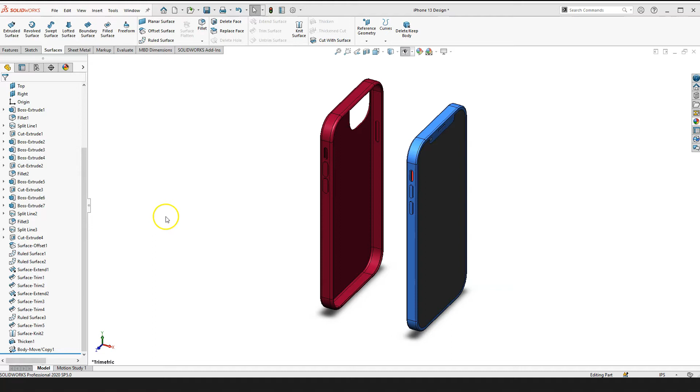Hi guys, in this video I will teach you how to design a cover for iPhone 13. If you have not seen my video on how to design the iPhone 13, please watch that - you will need that design to make this cover. Also please watch the surface modeling techniques for the spoon design, because this cover is pretty much done using all surface features.

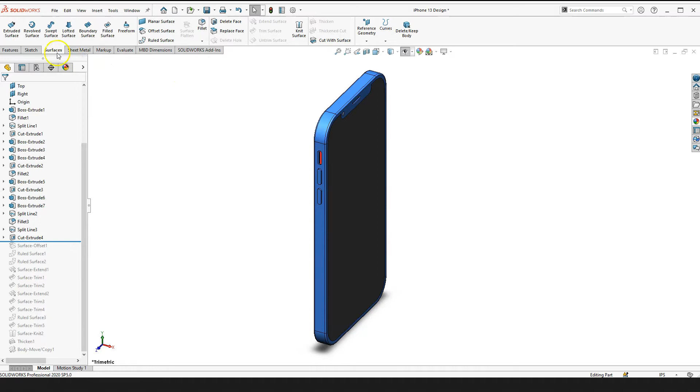Okay, so with the iPhone design, this is where I left off, and I'll go ahead and begin my cover design. First thing you want to do is click on Surface, then click on Offset Surface, and give it about 0.01 inches.

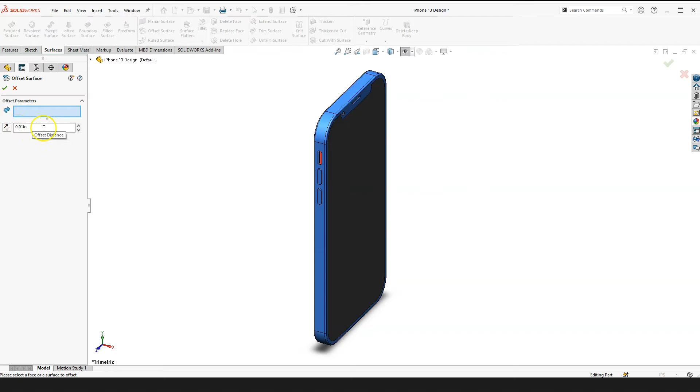I'm working with inches, not millimeters. After you give that offset distance, go ahead and click on the surfaces that you want offsetted. I'll go ahead and begin - I'll click on that surface, and I'll just pretty much go around and pick up all the surfaces.

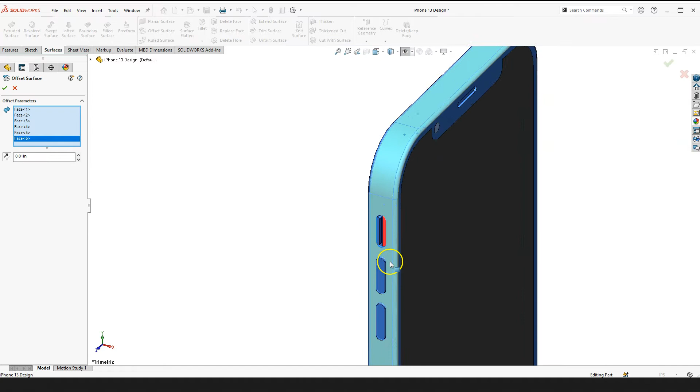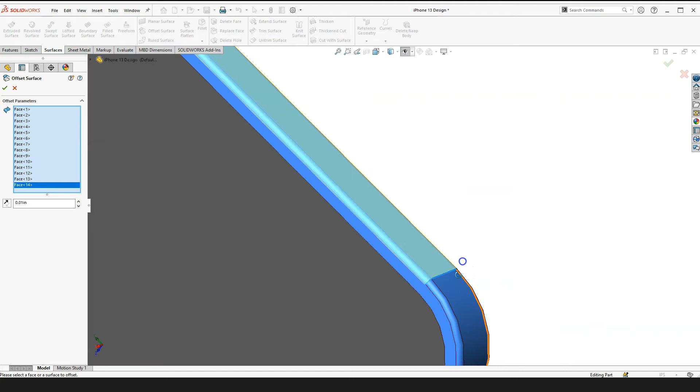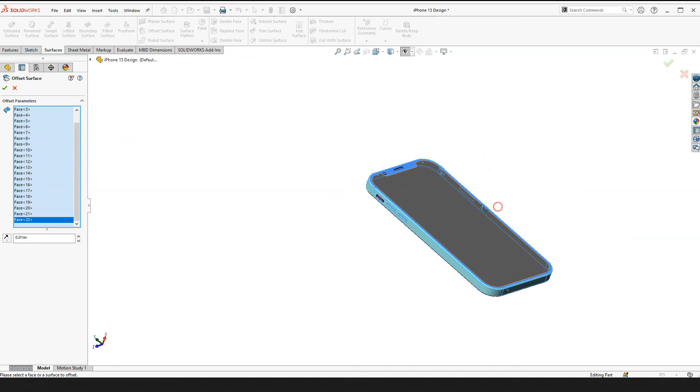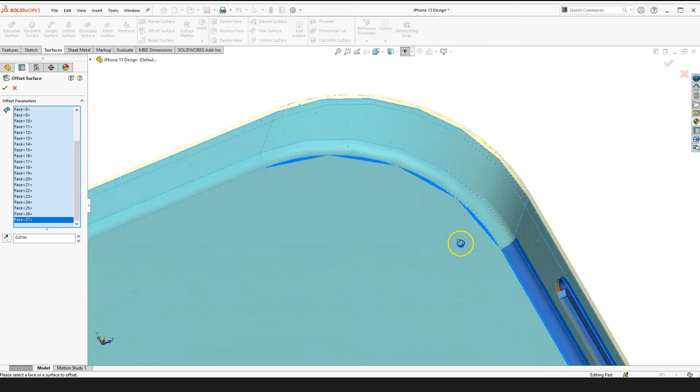Surface there, that surface, that surface, that surface, that surface, that. I'll click on the flat for my buttons as well - that surface, and this surface as well. From back here, I'll do the flat surface, that surface, that surface. So I'm pretty much going around just picking up the outer faces of my iPhone.

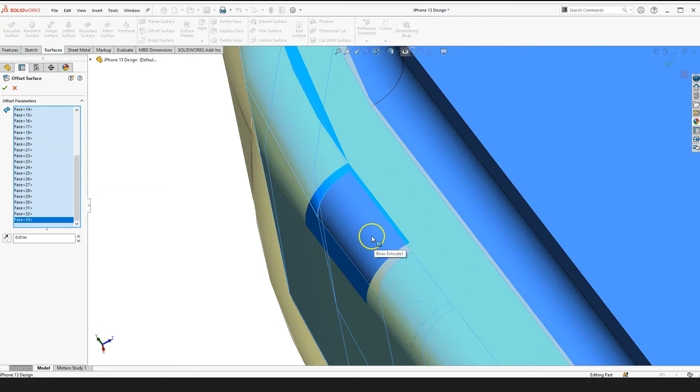When I'm done with this, it will be like the surface models - you won't have any thickness or anything. I'm almost done here. I think I pretty much have all the surfaces I need from the iPhone, so I'll click on my check mark, press OK, and hide my iPhone to look at my surfaces.

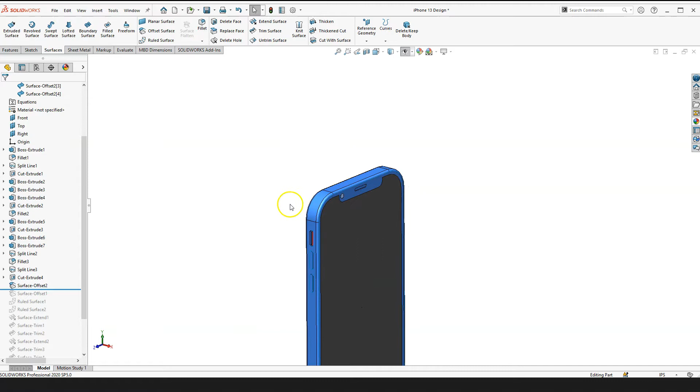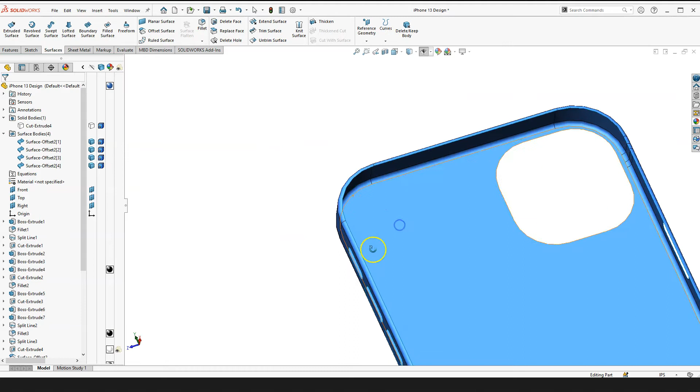Up here, go to Solid Bodies, click on this arrow button, and you can hide it from there - hide that. Now what I have is pretty much the outside surfaces of my iPhone 13, offsetted outward about 0.01 inches.

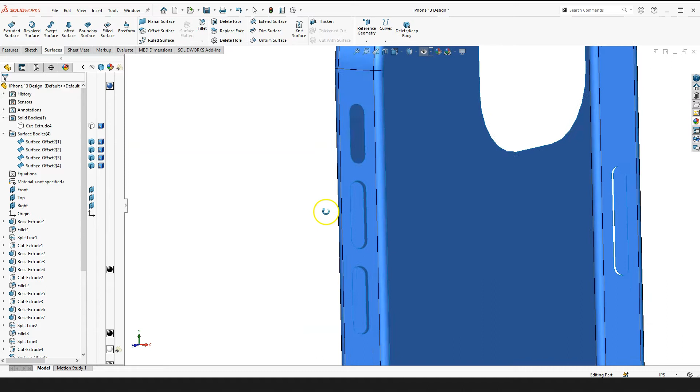Next thing I'll do is work on these features here and try to merge them. Right now I have about four independent surfaces, so what I need to do is combine all these surfaces to the main surface, this guy right here. I'll go ahead and do that.

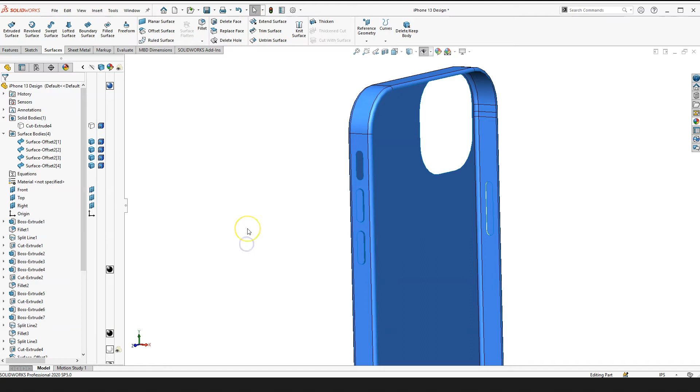To do that, I'll most likely use a Ruled Surface and Extend Surface, but let me go ahead and begin. I'll work on this surface first - I'll rotate it.

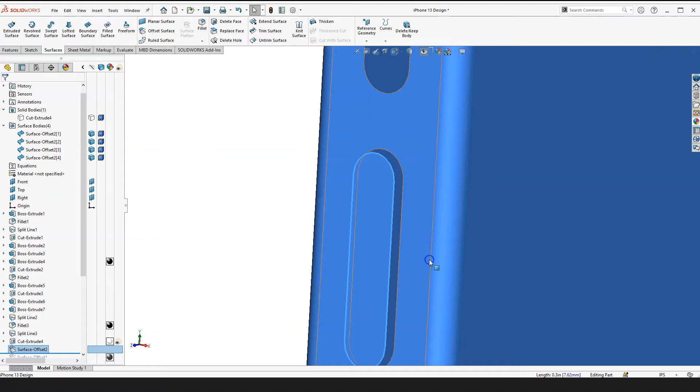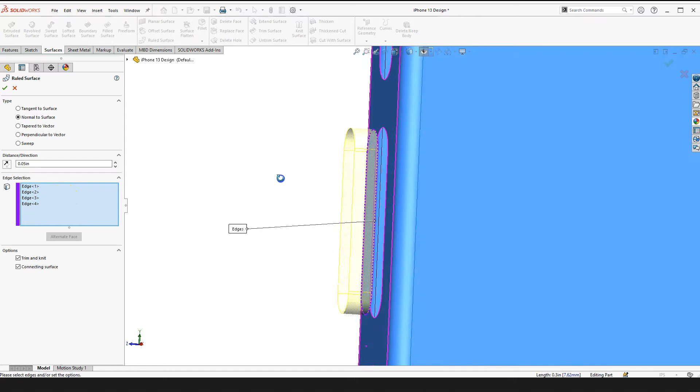I'll click on that line, right click, and do Select Open Loop, so it goes around and selects all the edges for me. Then I'll click on Ruled Surface. Here you have a couple options - tangent to surface, which will be flat, or normal to surface, which will be 90 degrees, and that's what I'm looking for. I will flip it to the other side.

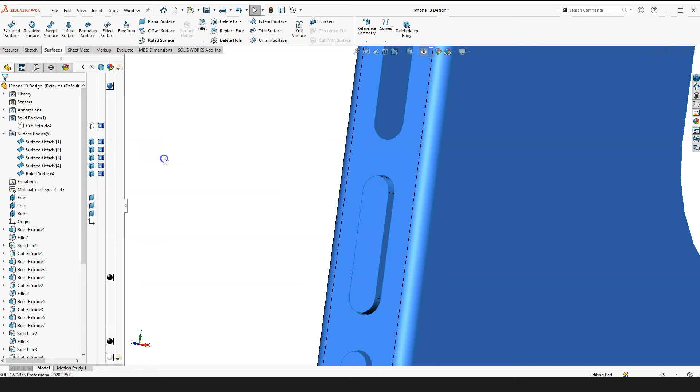So what I'm trying to do here is extend this feature to make that indented feature for the buttons. I'll show you what it will look like when I'm done. After that, once you do that - I'll leave the color for now.

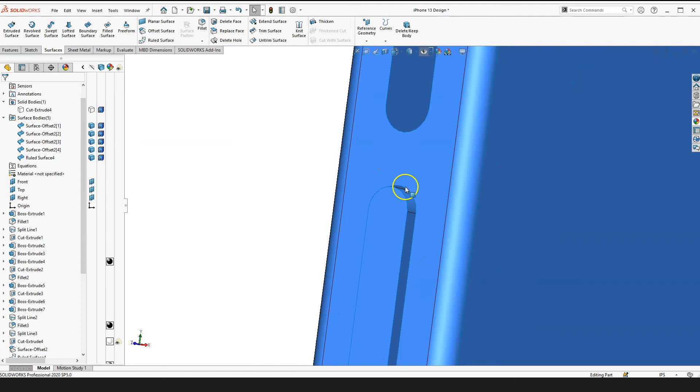So what I'll do is extend the lines for this hole as well, so it will intersect this ruled surface I just created. I want the surfaces to be inside of that ruled surface so I can trim it here, and I'll show you what I mean by that.

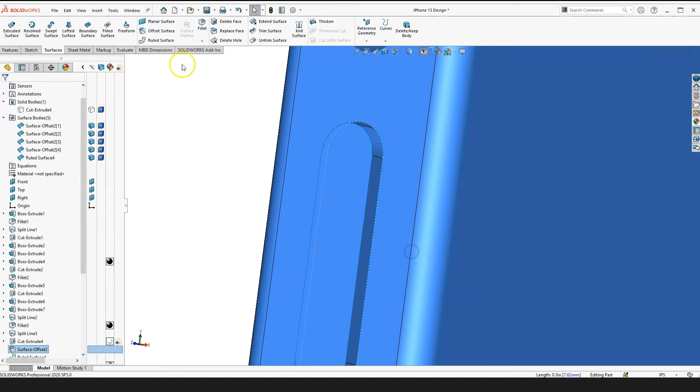Click on that line, right click, do Select Open Loop, and do Extend Surface. Give it like 0.02, or just enough so that it intersects that ruled surface. If you rotate it, do a same surface there, and click OK.

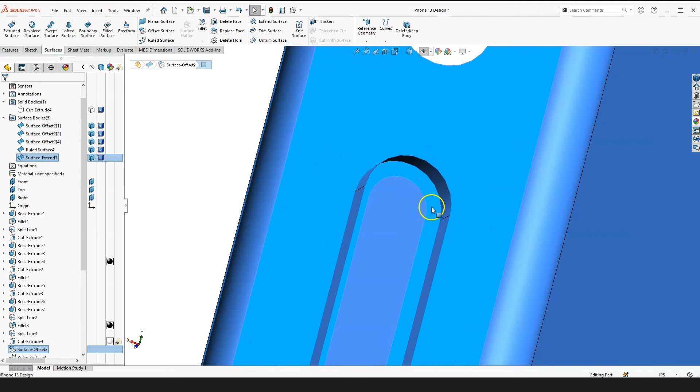If you look at that surface I just created, I can give it a different color - a dark color for now so it's easier to see. That extended surface I just created from that surface is now inside of that ruled surface.

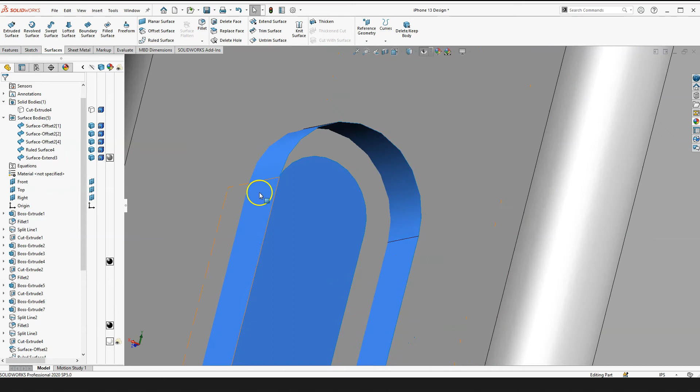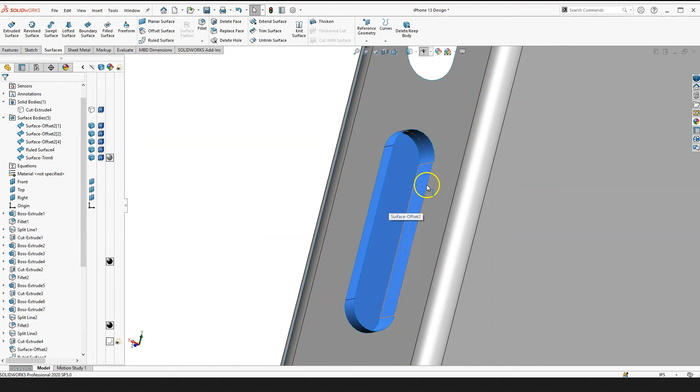So what I'll do is trim these surfaces. Click on Trim Surface, and use this ruled surface as your trim tool - click on this guy. Now go down, click on Remove Selection, and click on that surface. Right now it removes that surface for me, and I'll need to do it one more time. So I'm going to do Trim Surface again, and for my trim tool, click on the main body.

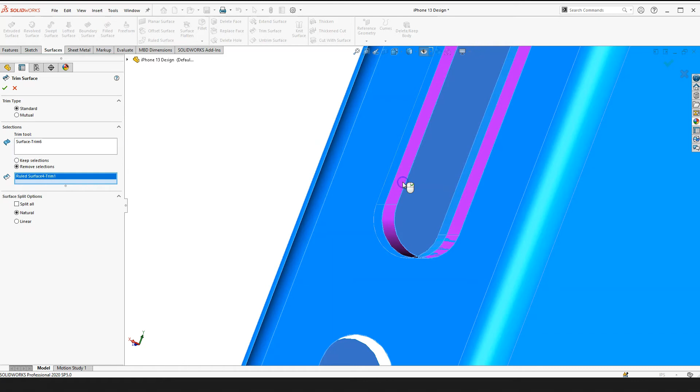Because I want to remove that extended surface, click on this guy, remove, and click on this guy. So if you look at it now, I have that indented feature and all these.

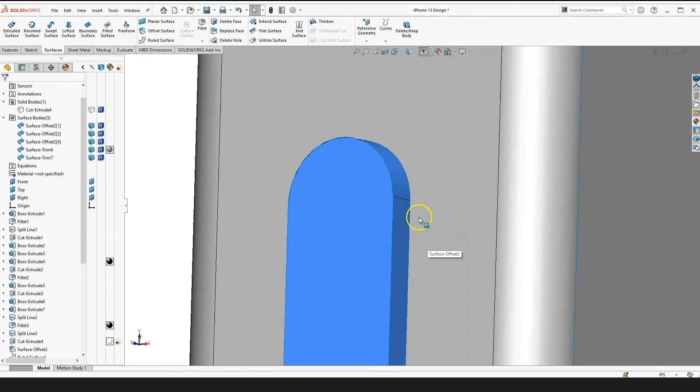Pretty much what I'm trying to do is when you thicken this part, you have to make sure they all line up. You want to make sure there are no holes between these connection points, otherwise you won't be able to do a thicken. It won't work.

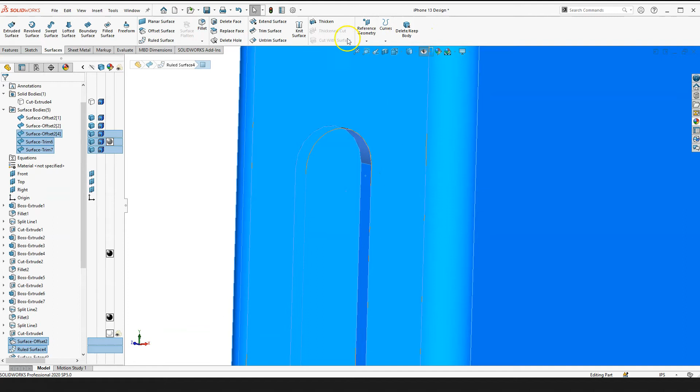So when you do a trim and knit feature, I'll show you here, I can now knit these to the main body. Click on your two surfaces, click on that surface, hold down control and click on that surface, that surface, and that surface.

Click on knit surface, shouldn't be a face, but see what it does, and click on the check mark. Okay, yeah, it didn't work. You need to click on the whole thing, not the face, right? Because if you look, there's a dark line here.

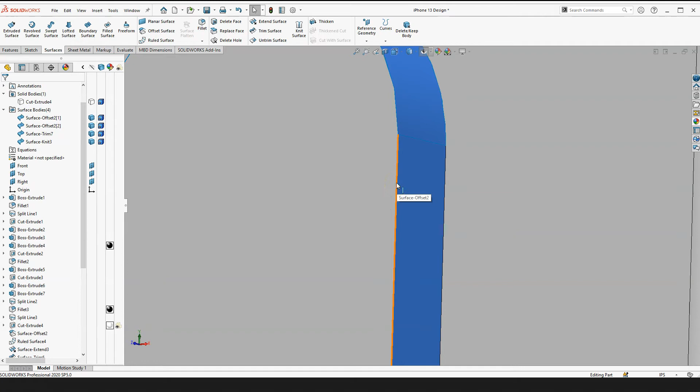That means the surface was knitted only here, here, and here, but it's open everywhere else. I don't want that. I'll delete that again and do it one more time.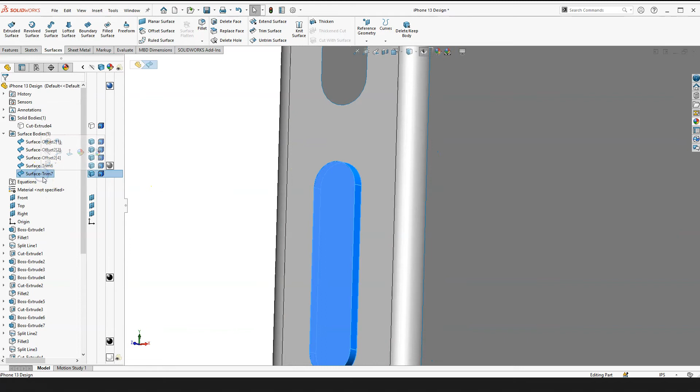So the surfaces I want to knit are that surface, my trim 6, and hopefully let's see what that surface is, and this surface right there. Click on it, do knit surface, and click on the check mark.

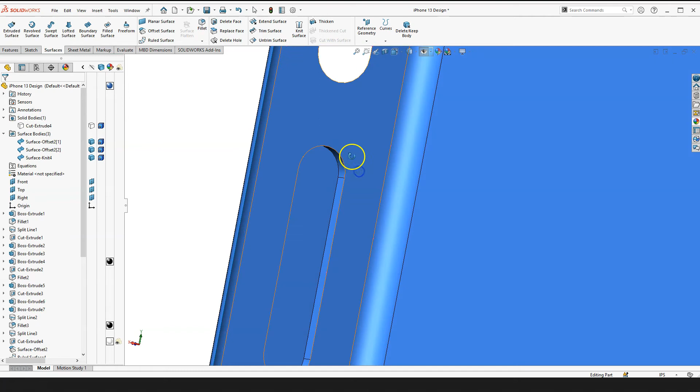Now see how everything turns blue. That means all my surfaces are merged together. So if I click on this guy, see how it highlights those surfaces and they are merged there.

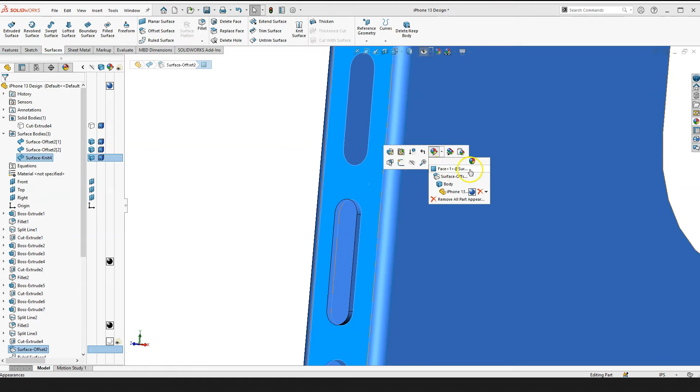So I want to change the color. That blue is making it hard to see, so I'll just change that color one more time and do face. I could just remove the color that was already there.

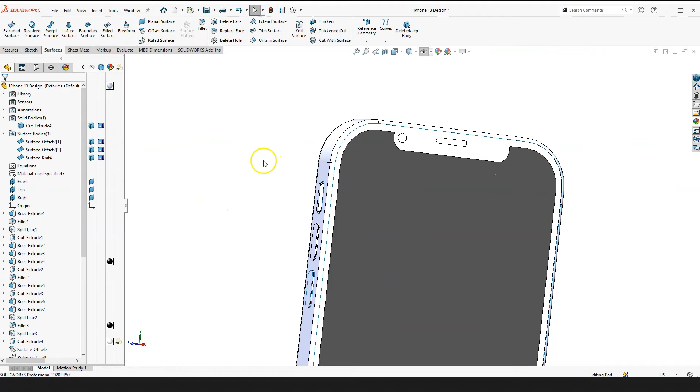Let's see what that does. Yep, it gives me nice surfaces here to look at for now. But I'm not sure if it removed the color from my iPhone. No, it did not, but I can add that color back later on. It's not a big deal.

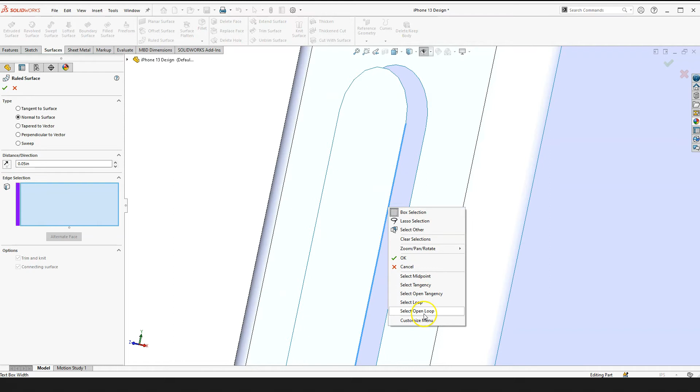I'll hide that. Okay, so you want to do the same thing here. Do ruled surface, right click on that line, do an open loop, and flip it to the other side. Make sure it's normal too, and just give it a 0.05 depth.

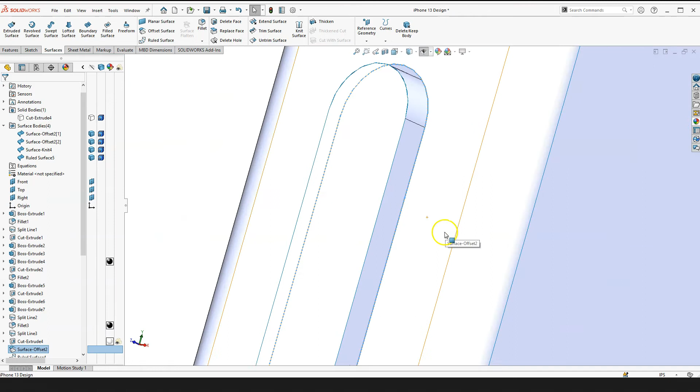Same thing, now that open hole on the cover, click on that line, right click, do select open loop, and you can extend the surface inward so it intersects with the ruled surface there.

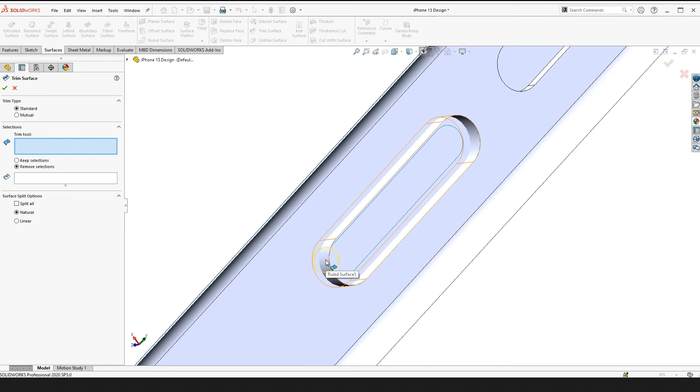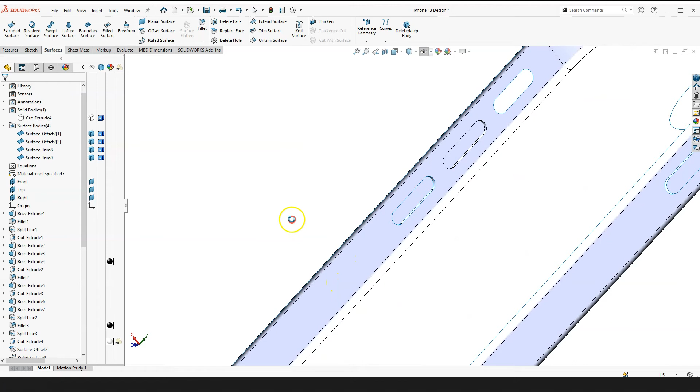And what I'll do is trim these unneeded surfaces again. Trim surface, trim tool, click on my ruled surface, remove selection, click on the inside surface that's excess there. I'll delete it, do it one more time, trim surface, make this the body as a tool, and you want to remove this guy from the body. Click on it, so now you have that really nice looking feature here.

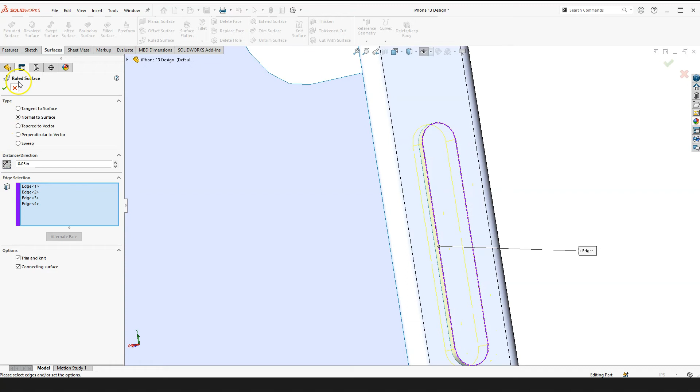Same thing on this side. So click on ruled surfaces and right click on the line, do open loop, flip it, and exit out.

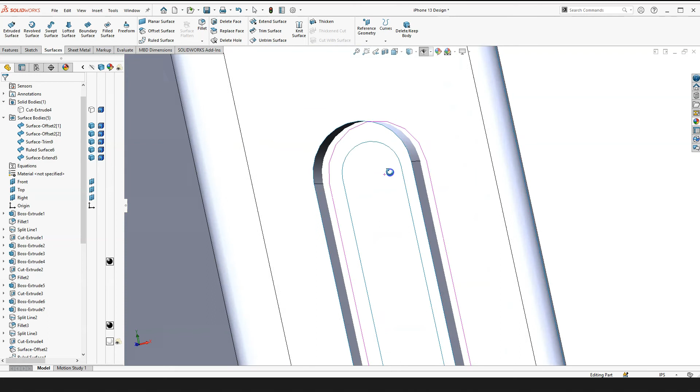And the same thing one more time, but you want to extend it on the outside, the hole on the skin. Click on it, right click, do select open loop, do extend surface inward, and we can do the trim again. You can do trim surface, make the ruled surface as your tool, and you want to remove that inside material.

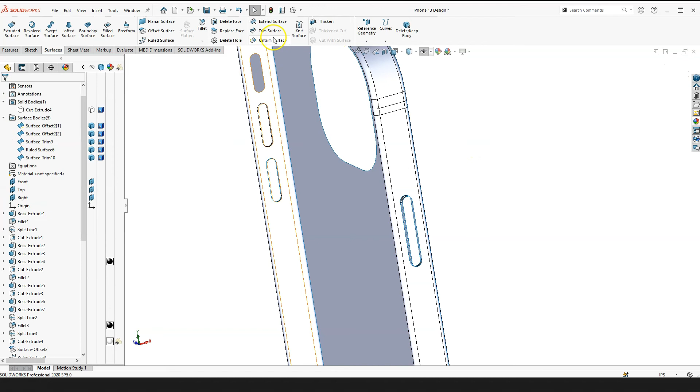You can do it one more time. Click on trim surface, click on... that didn't work. Trim surface, that body as a tool, and the excess material you want to remove is this guy here. Click on that surface and press OK.

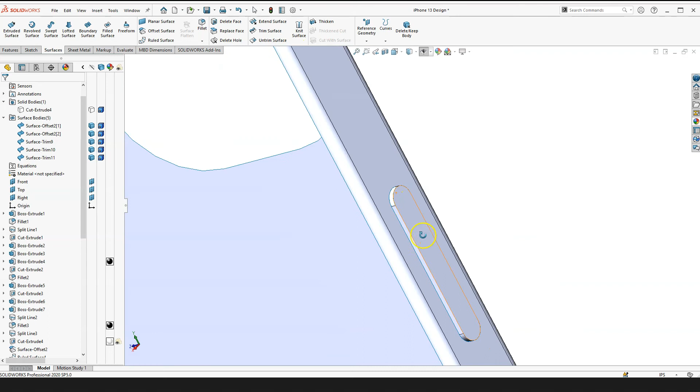There you go. So these are still open. We still need to go and knit or merge all these open surfaces to the main body, like I showed you how to do it there.

But to do that, I could do all that at once, right? So here I have that knit surface I created earlier for this guy, but I'll delete it.

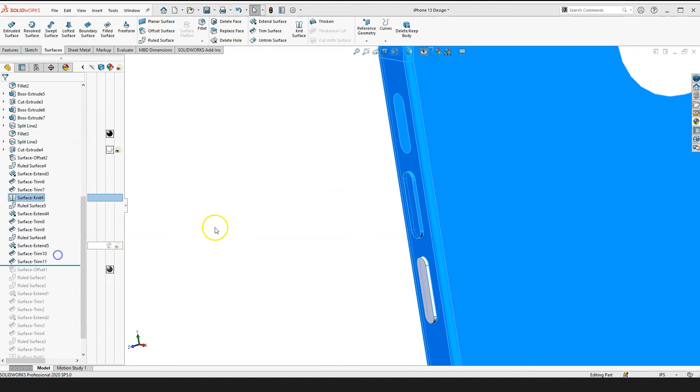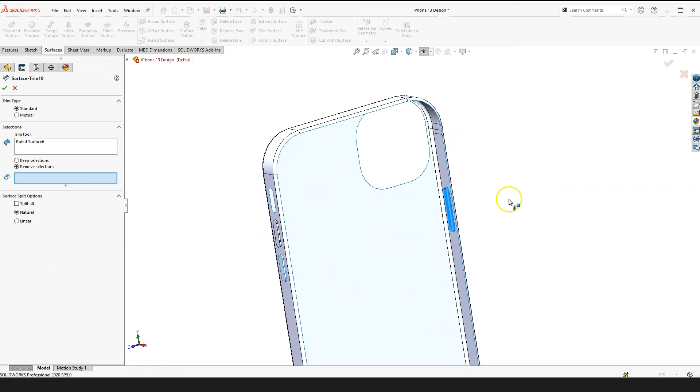Okay, it gave me a bunch of errors. I don't want to do that, I'll just do undo there. Okay, it gave me a problem there, but I'll go see what's the problem here. Oh, okay, so ruled surface and remove selection.

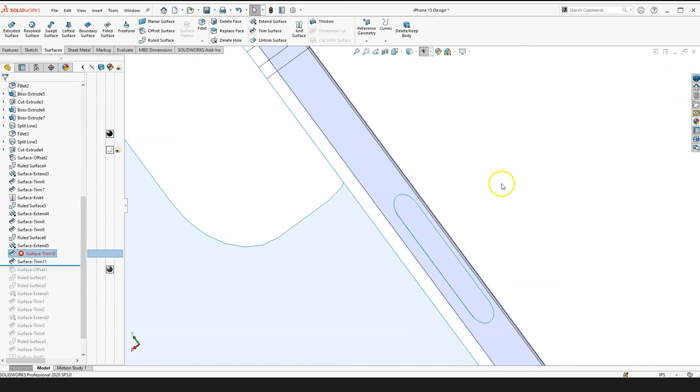Oh okay, it just extended the surface outward instead of—I'm not sure what it did here, but I'll go ahead and fix that. I'll delete that. Yeah, surface body can be tricky, guys, so you have to be very careful here.

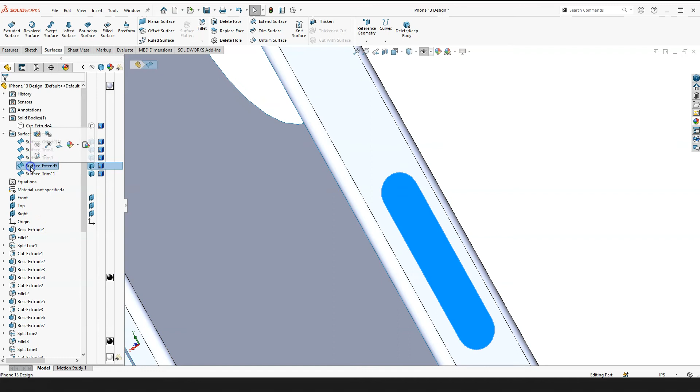I think we just close that loop here. Is that an extra surface that created there? That extend surface there—oh, it extended it. So I'll delete that.

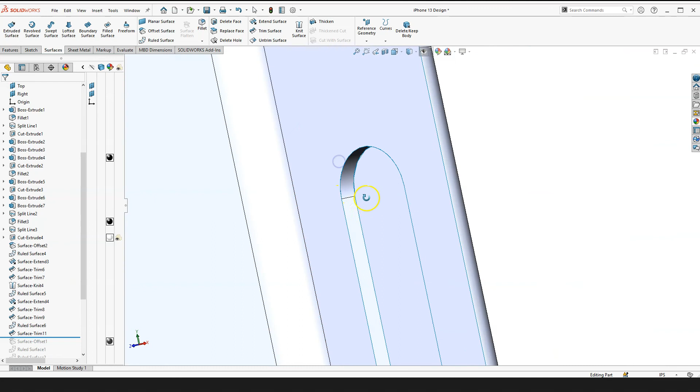Okay, now I am back to normal. I'm back to where I was there, but that threw off—I guess it didn't like it. It threw up an error when I deleted that knit surface.

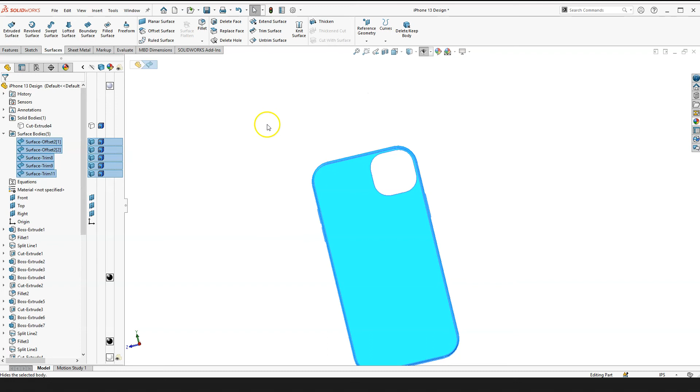But what I could have done was I didn't have to do the knit surface here. I could have done it once everything was ready to be knitted, like here. All these opens—if you go to your surface body, go ahead and click all of them. Hold down shift and click the last surface, do knit surface here, and just click on the check mark, and now I have one body. That means all the open surfaces that were there are now all closed and merged into that body.

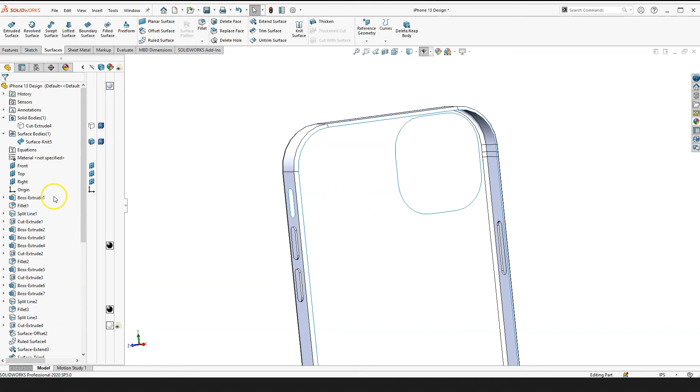Now what I can do is a thicken here, and I can make a solid body out of this surface body. But let me show you how to do that.

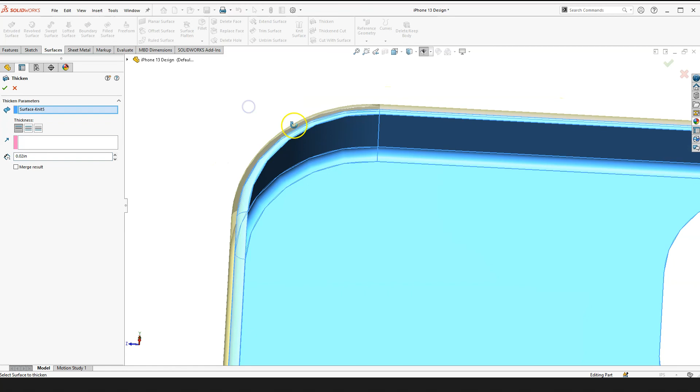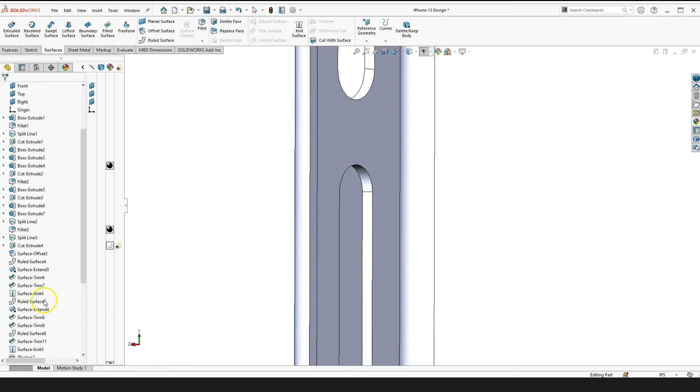Click on this surface body, go to thicken, and I'm just going to give it a really low thickness here, 0.02. And the outside—I want to do it outside, I don't want to go inward. That looks about right there, press OK. And there you go, so it went from a surface body to a solid body because I gave it a thickness there. But I left that hole just like that. If you want to try to do the similar thing with the extend surface and ruled surfaces, you could do that as well.

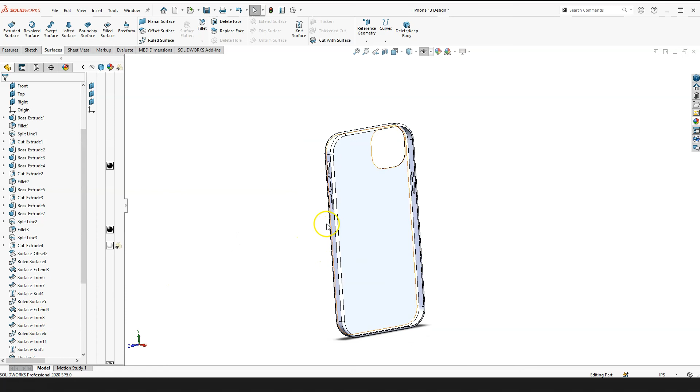But let me go ahead and give this a color. So that's pretty much how you utilize surface modeling to create a whole different part. Here I did not even do a single sketch to make this part, but to create this part with sketches it would be very complicated. This is an advanced surface modeling technique here. If you're working with plastics and injection molded parts, this will come in really handy.

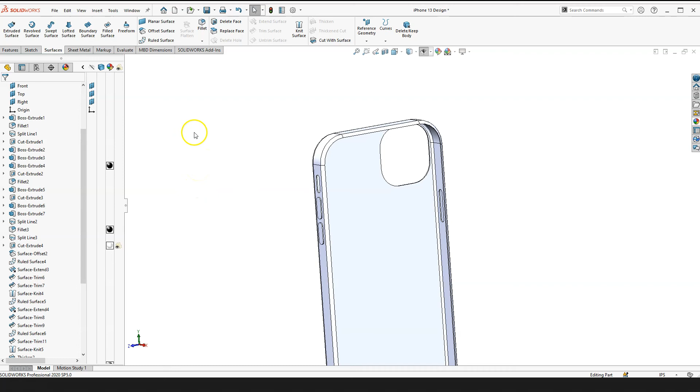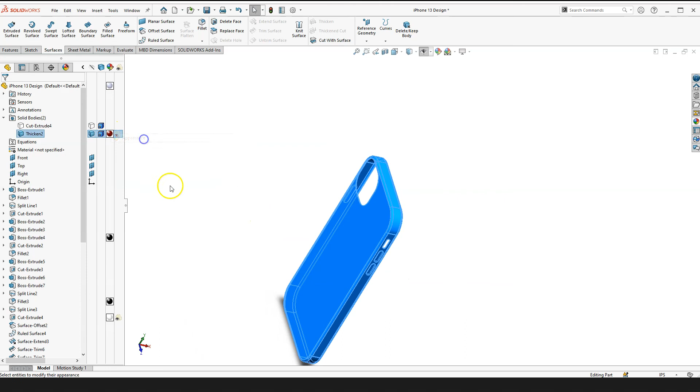So just keep that in mind. But let me give a color to this feature. I will go to appearance and just give it a nice color, whatever looks good to you, something like that. It's a red color here, but change the color if you don't like it. Okay, make it more of a maroon type of color there.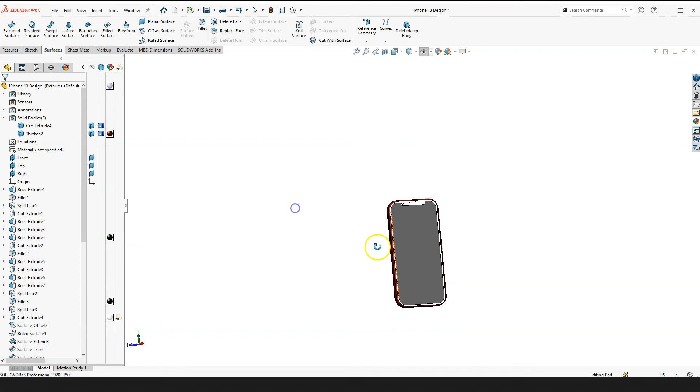And I'm going to turn on my iPhone also. So this right here is my iPhone. So I have two bodies, one cover and one iPhone. I lost my color on the iPhone, but that's okay—you can add a color to your iPhone if you want just by clicking there. I'm going to hold down, press my space bar, do isometric, and there you go. I just designed a cover.

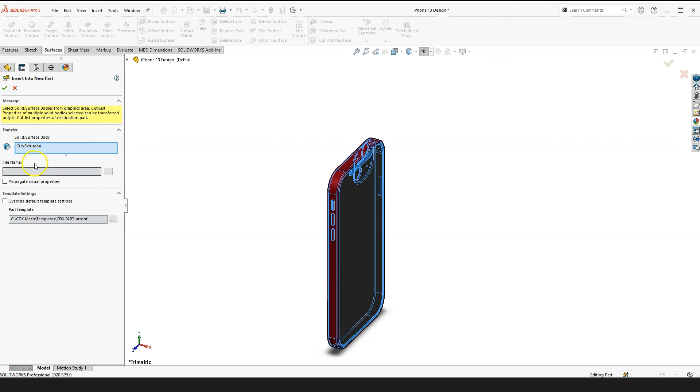Now I'm going to do a collapse here. So what you can also do is, if you right click, you can do insert into new part. Now you can create a new part from here and give it a new name and save it to a file you want. These are two independent separate parts where you can make them independent from each other. Just right click and go to insert into new part, choose a file you want to put it to, give it a name, and you'll create a new part.

After that, you can go to assembly and create an assembly with these parts together. But I will save that for a different time when I do a tutorial on assemblies.

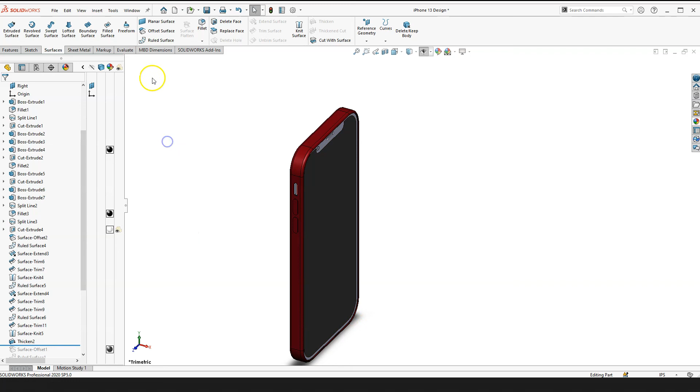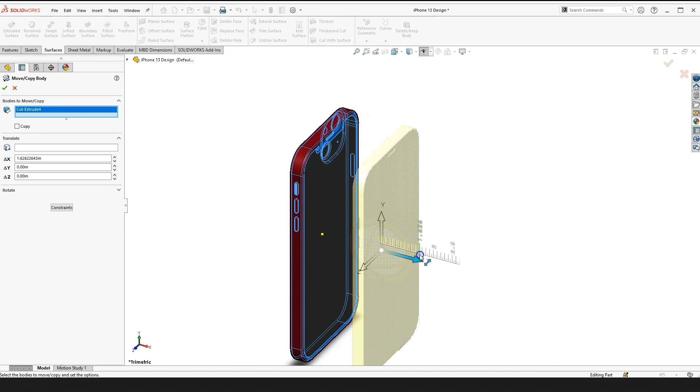But in the part file, I can move this part out of the way, and I'll show you how to do that. If you go to insert features, you go to move and copy. Make sure your copy is unchecked—I don't want to make a copy, I just want to move that out of the way. Click on it, now click on the part you want to move. Click on your iPhone and just drag it out like that, drag it however much you need there, and press OK, and there you go. So it kind of looks like an assembly, but this is still a part file, not an assembly.

But like I said earlier, save these as independent pieces, and you can make an assembly out of it as well. I'll show you how to do that in later videos.